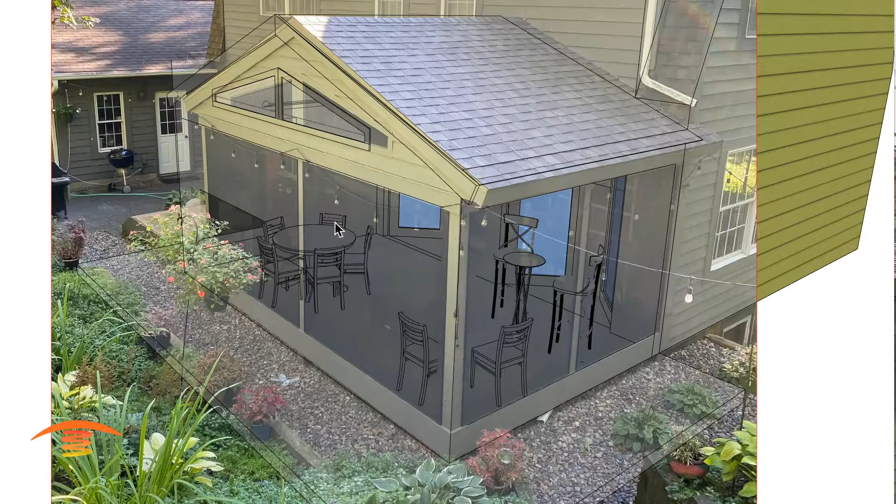Today we're going to take a look at this application here. It's a residential, and we have a couple of different seating arrangements here. So we have some bar stool, just reclining here, and then some dining area over on this side here. Let's go ahead and look at it from this approach here. So we have, again, here's some other issues that we want to talk about. The doors, got some can lights up here, and then a fan in the middle.

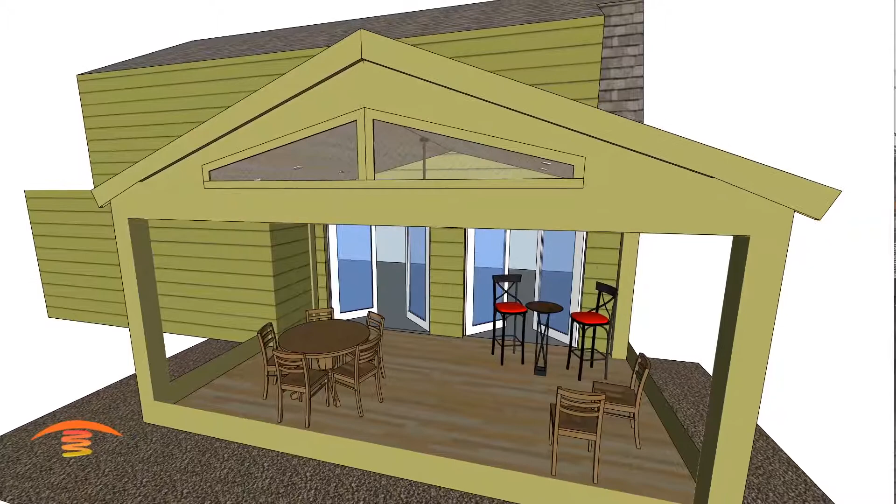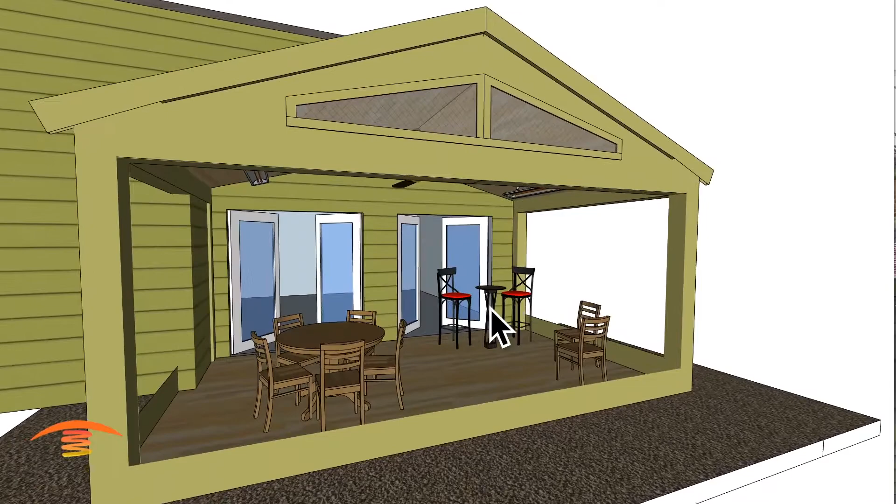So let's go ahead and look at the overall dimensions. I have taken off the screen itself, so we have it screened in here. But also this is in a very cold climate in the winter, so I'm going to place a hotter heater in here than I would normally recommend. And also, again, we have to be really concerned about the seating arrangement up here. I'll talk about that in a minute, but you definitely want to consider a control system for an application like this, because it's going to be a very hot situation in the summer, and you're going to want as much heat as you can get in there in the winter.

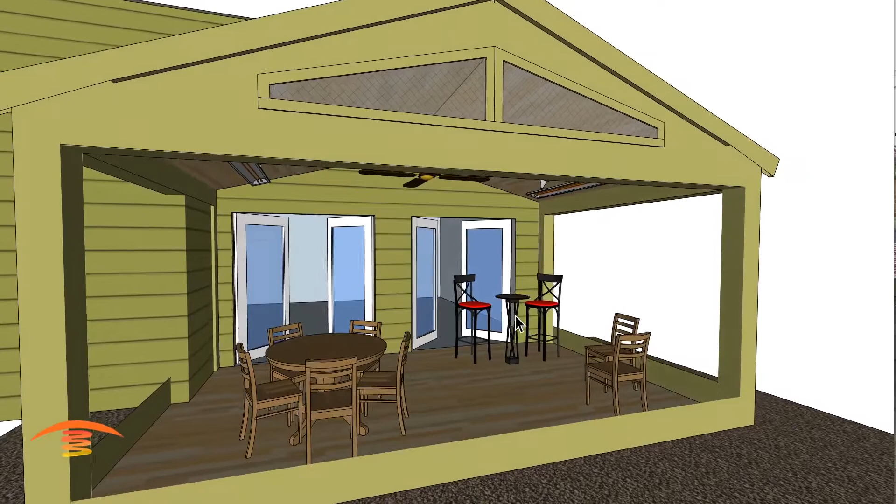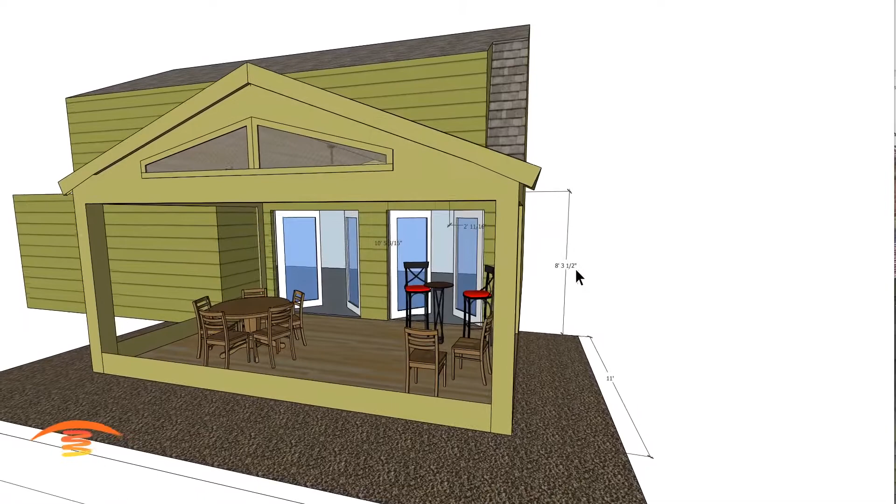So let's go ahead and look at the overall dimensions. Let's see if I have it here. Whoops, I got the wrong one on here. Let's turn that on. There we go. So we have 11 feet wide by 17.8 and a height of approximately 8 foot 3 inches by 10 foot 5 inches to the center of the room here.

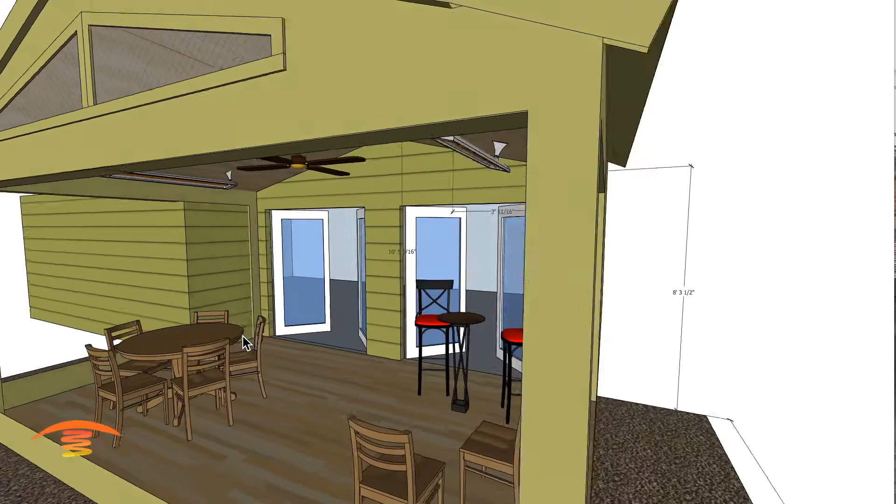So again, we want to talk about these doors. The only way this is going to work out is if these doors swing inwards, and the customer has confirmed that, but if they swung outwards, that would be a whole other issue, because that door would actually come in contact with the bottom of the heater if it was open, and that could be an issue. So we want to take a look at that.

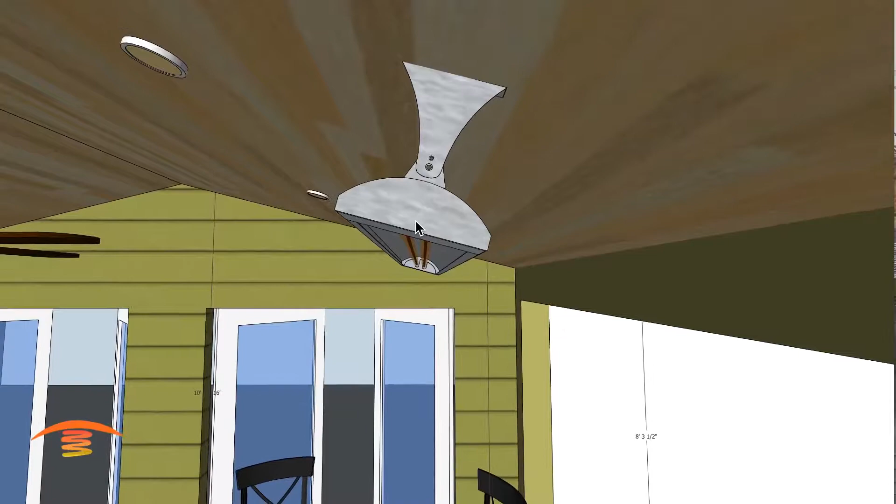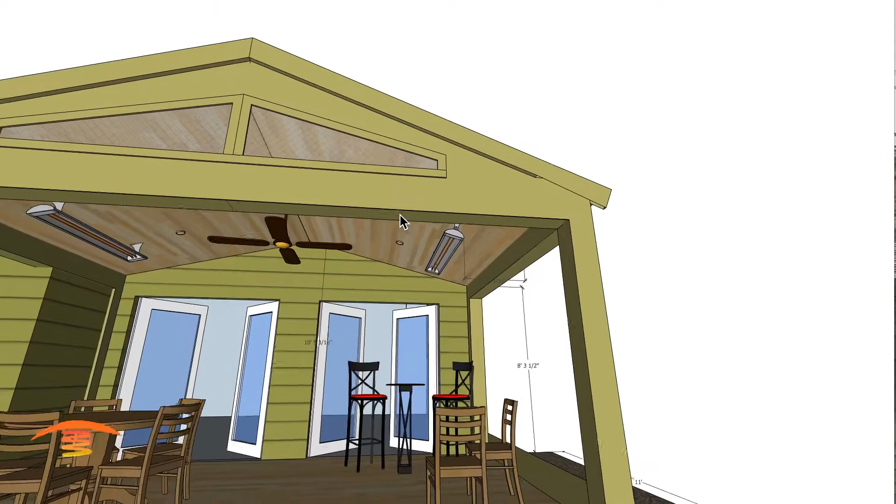Also, I have these at approximately a 15 degree angle. So you can see here I have them mounted on the ceiling with about a 15 degree angle, so that we get the best coverage possible. And also it's about 2 feet 1 inch off of the edge of this beam here. I would like to place the heaters a little bit further in, but because of these lights here, I don't want to detract from that lighting ability.

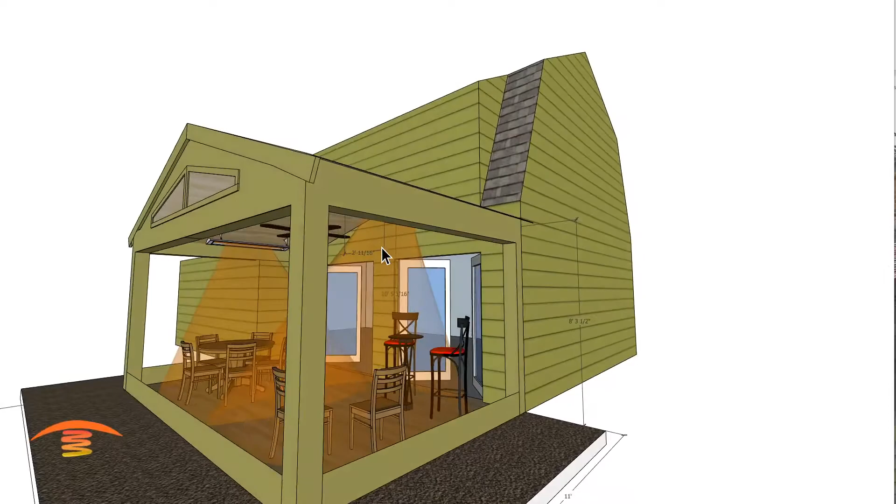So let's go ahead and look at the ray, the footprint of the heater. Oh, and the other thing is I do have them centered in this space here. So from left to right, it's centered middle, along with a fan, I believe. So let's look at, again, the footprint of heat. So here you can see everything looks great as far as its output. Again, you got to use a control system on an application like this, otherwise it'll be too hot.

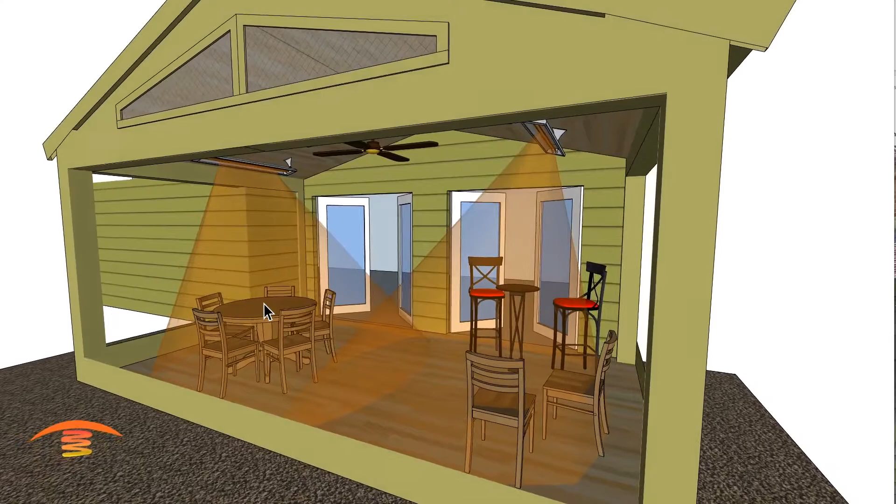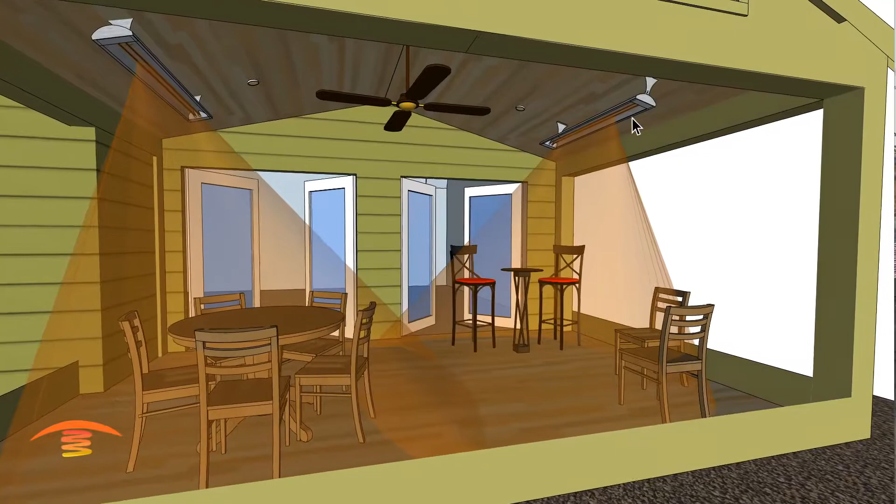And this is a 6,000 watt unit, and normally I'd put a 6,000 watt unit at 9 feet and above. So this is approximately 8.5 feet off the ground at the bottom of the heater, and ideally 9 feet and above, so I would even go as high as 12 feet with this unit. But because of the location, I'm choosing this so we can get as much heat as we can for those cold climates, and extend our time outside as much as possible.

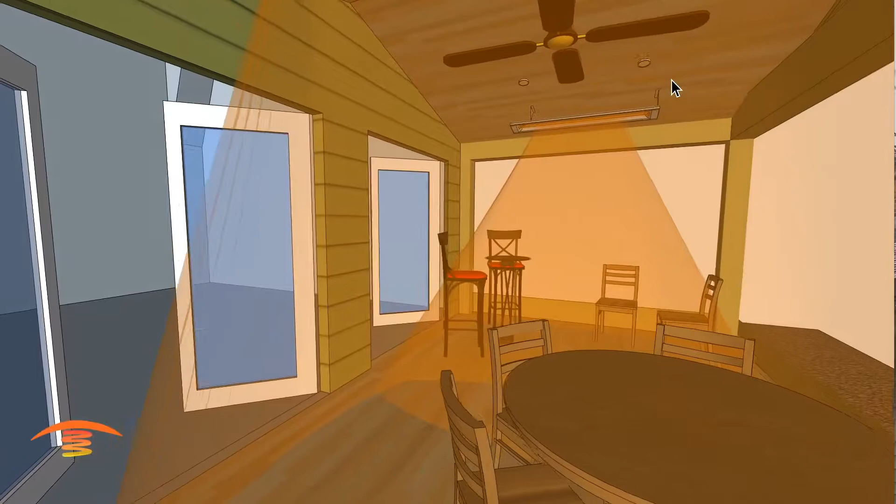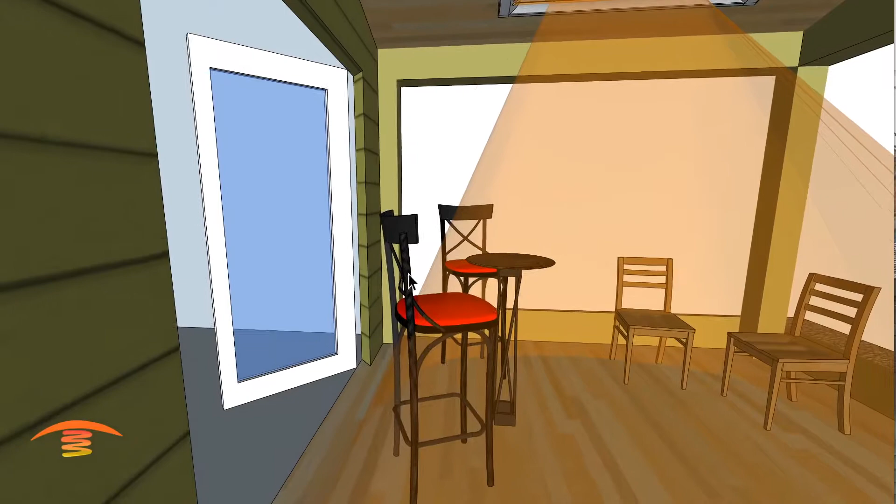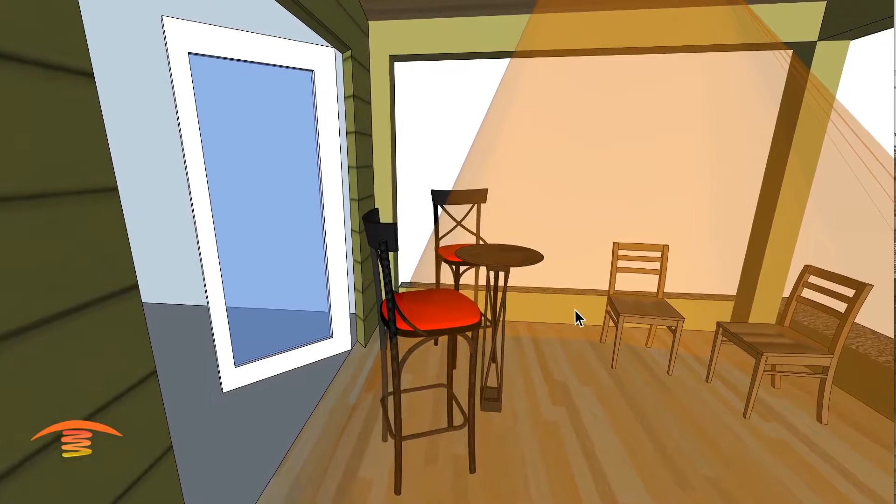However, talking about this seating height, obviously this ray is not penetrating the seating position on this particular layout that I have with these chairs, but if you move the chairs a little bit further in, you'd be underneath that ray, and that would be fine. However, you're so much closer than the normal seating height that you'd be way too hot right here. So if you don't have a control system where you can dim this down to, let's say, 25–50%, this seating area would be way too hot, and it would not be comfortable.

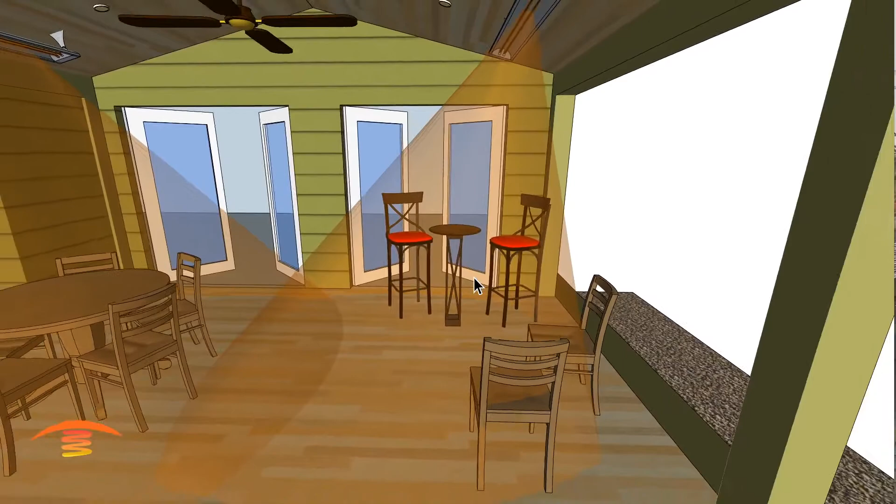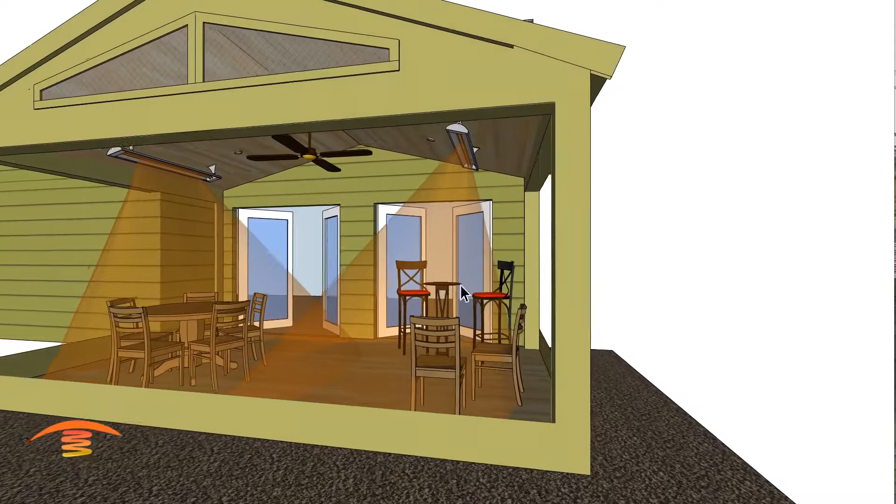But essentially that's what we have. We have just the two 6,000 watt units, and I think that would be great for this application. It'll give you a very wide span seasonally with this type of heaters. Now you can go to a 4,000 watt heater. However, even a 4,000 watt heater would be too hot in this seating position most of the time. Maybe not in the winter, but definitely in the summer. So, all right, well, there you have it.